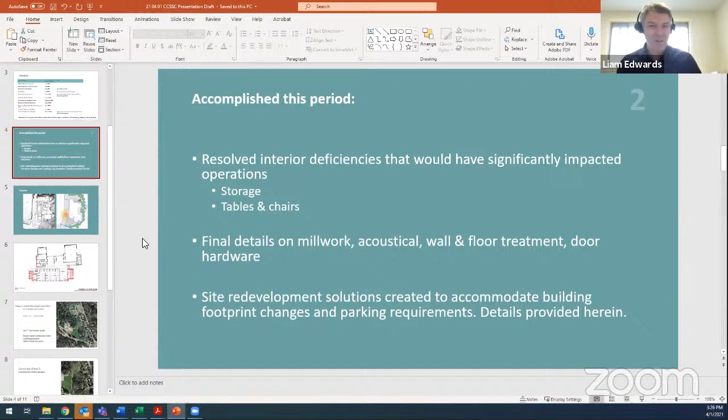Yeah, and it's even down to the millwork. If we're building all these lockable cabinets, how do we schedule those keys for all the cabinets? Who has access to what? Countless decisions in these areas of fine details we're working through.

I'll just pause, see if Liam or Sam or Jackie, Jamie want to add anything into all of that. No? Okay, I don't see anything.

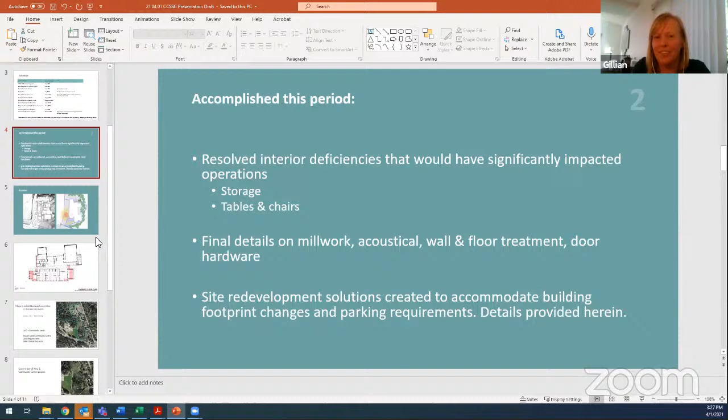Great, so now we'll think about the exterior. So that's just some of the work we've been doing on the interior. But there were pressures on the exterior design we noted, and we'll talk more about that as we go through. With the next slide, we can look at one of the main issues we were addressing.

Hate to interrupt the flow, but the other thing we should have added is the redevelopment of a building permit application. I know we talked about it last time, but that's been another stream of work. So speaking for the design team and others, lots of concurrent work happening simultaneously.

Those elements we just touched on, and now we're going to get into the site, but from a professional perspective as well, we're also resubmitting and getting an updated building permit because our old one's from 2018 and the codes keep changing. So that's another stream of work accomplished in the last little while.

We don't have the new building permit yet, though, do we? Well, we're just doing an amendment to our existing one by updating - we had to get some new geotechnical studies because of little bits of extra support needed for a revision to our updated BP.

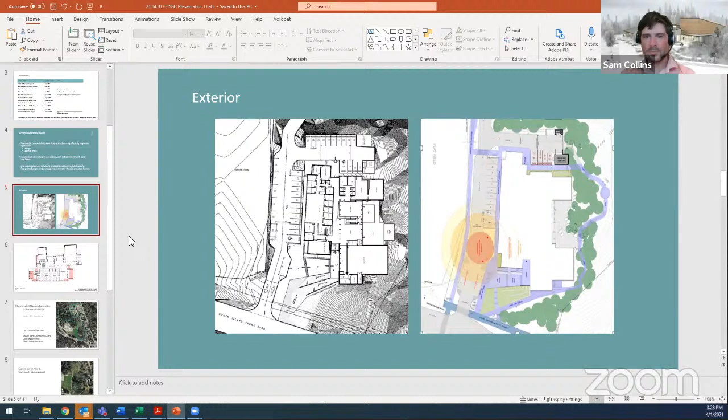Sorry, Gillian and Liam. No, absolutely, it's fine. So looking at this image here on the screen, on the left was the proposed. Can you make the image bigger, like maybe get rid of the thumbnails on the left side?

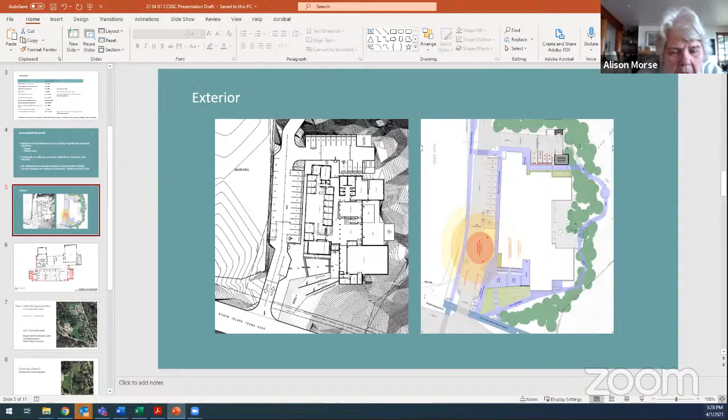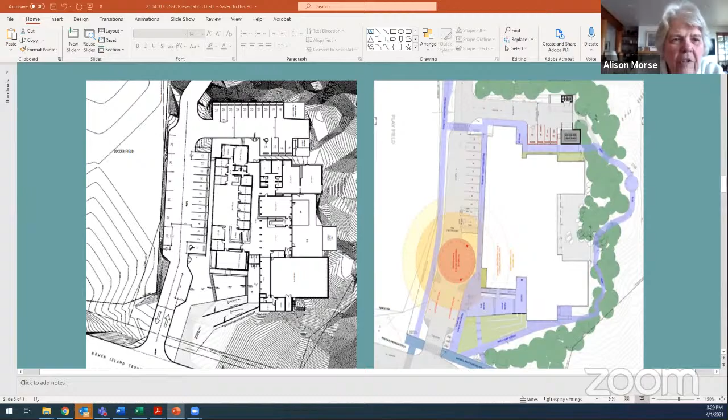How's that? That's better. But blow it up a bit. If you go into presentation mode, set it to play PowerPoint, you get rid of that stuff, don't you? I think you'll lose the way PowerPoint works. You probably don't see it as the full PowerPoint right now, do you? No, I'm seeing your toolbar across the top and everything. So yeah, let me do this, because the way PowerPoint works, it changes the screen it moves to when you load it. Okay, so now is that better?

That's better, but could you make it a little bigger? And I'm on my big laptop. Now I have to stop. Oh, to make it bigger, never mind. Okay, go back, definitely forget it. Alison, you may be able to just minimize seeing us and maximize. Yeah, no, I'm going to do that anyhow.

Okay, I'm going back to the old screen because I can make it a bit bigger. This isn't so much about seeing the detail in this screen. Rather, it's about hopefully you can see the footprint of the building.

And so that was the original design footprint with the original entrance and parking. And this is the new footprint, which is very, very similar, just slightly larger.

So one of the challenges we noticed with the plan on the left was a lack of function for access of vehicles and pedestrians, particularly if you think of people just dropping off and picking up people from the community center. In this previous plan, there was no way to turn around easily and get out, so it's easy to imagine the congestion that would occur. Imagine 180 people coming out of a performance and how this would function.

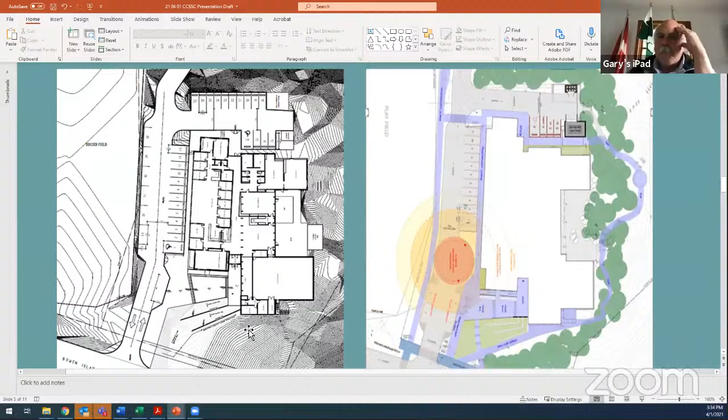Where does the gravel parking area that's beside the field and between the field and Trunk Road right now fit in, is that incorporated? That's basically the entrance, that disappears with the entrance. If you can see where my cursor is right now, that's basically where the gravel is right now.

There's two things maybe to add. We maintained the fire truck access to the field of play in this design, which is an important aspect. There's an emergency access right there, with some gates. So that's maintained. The larger service vehicles will still have to do their hammerhead turn at the back of the lot. That was all part of the discussions and conversations.

Well, the reason I asked about the gravel parking area is whether that could be utilized as a drop off for a bus. As you can see, the gravel parking area that exists right now is right here, and the diagonal red line I just put on the map is the fire emergency vehicle access to the back of the school, which would go across the field. What we're proposing as a design here, and the next slides will take us to the expanded area request, would provide even better, potentially better access to the back of the school.

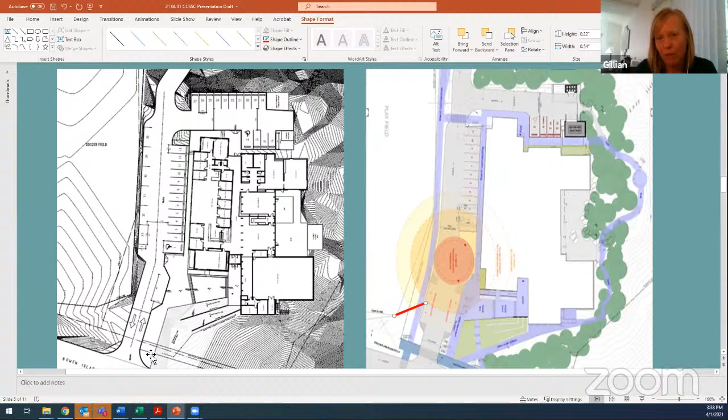Another point about the community bus is that the greatest likelihood of people getting off the bus to come to the community center is when it's on its return route to the cove, so stopping on the other side of the road. People would be picking up the bus to leave the community center, heading back out towards Blue Water. Yeah, so that helps a little bit.

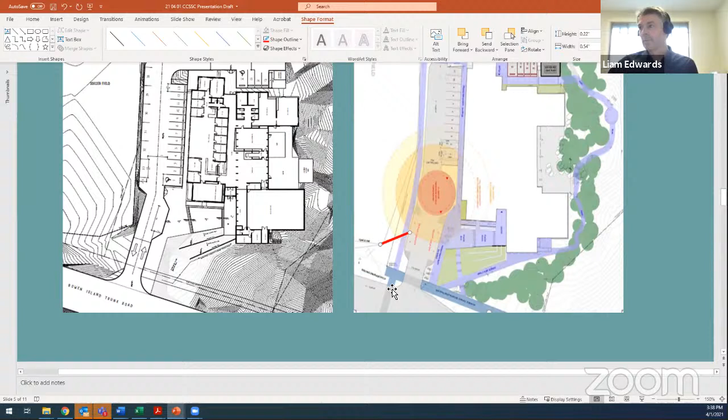And the Eagle Cliff bus. Right, yeah, well, they'd have to walk down the hill to get to that one. But there is a bus stop just down the hill as well, so they could easily just walk down to get on the bus to leave.

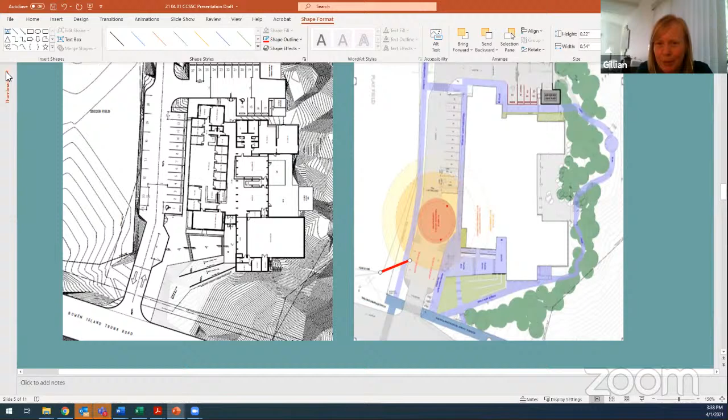So I think that segues nicely, Liam, into the next section. Okay.

So I can't recall, Gillian, this was just a reminder from the last meeting about the pressures on the footprint and what was adjusted. I don't think there was anything really to discuss on this one, but a reminder as we get into the next phase, thinking back on the previous slide as to what those pressures on the site were that changed the surrounding area and the civil infrastructure of the site.

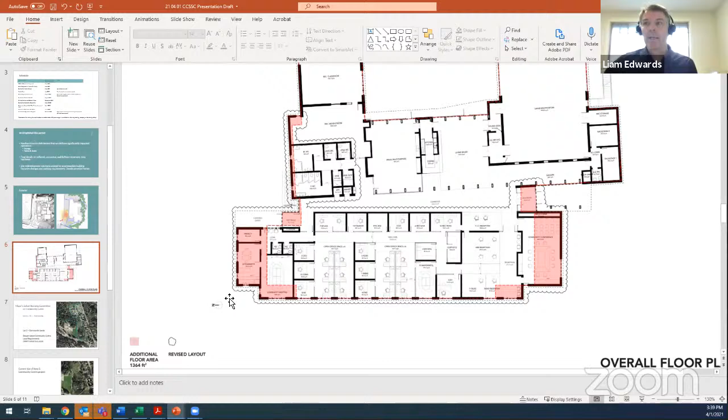So with the pressures on the site, when we look back to this slide, we see that much of the parking along the building edge remains, but the parking along the fence edge has disappeared because we also felt that this was too tight and that we needed easier and better access to the parking. And then in the back of the building, we lost this parking because we started getting too close to the steep edge. There's an embankment, quite a steep cliff off the edge.

And we also needed to improve some of the access to garbage collection, recycling collection, and things like that in the back here. It was very tight before.

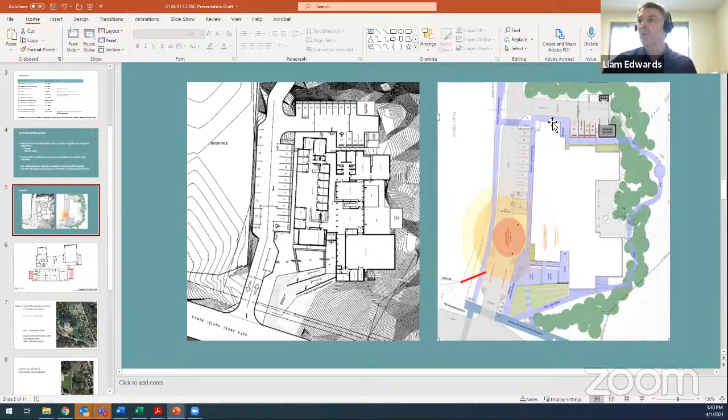So what we're looking at now is, to meet our own zoning requirements, we need to find this additional parking that we've stripped out. Plus, any additional parking that we could get would be highly beneficial for the facility, because we've known all along that parking was going to be an issue.

And then even perhaps more importantly than parking in and of itself, during construction we want to be very clear with the vendor that their trades, their construction vehicles, are going to have to stay in a designated parking area. We don't want them scattered throughout the cove or up and down the Trunk Road Hill. And there was never any consideration for where the laydown area would be for construction, or where there would be a staging area for the construction.

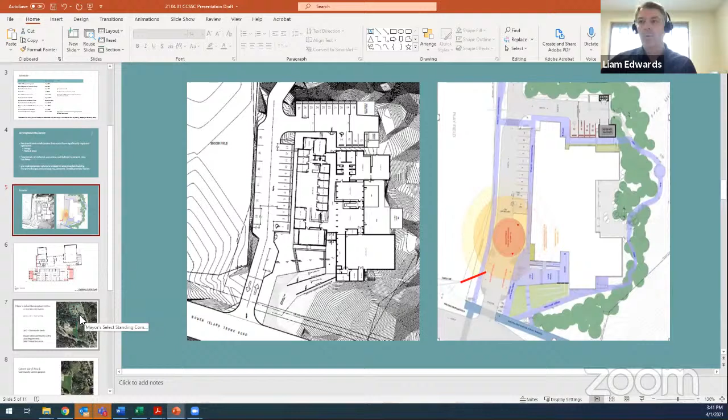So we felt like, okay, we really need to think about the construction needs and additional parking needs. So we started exploring that.

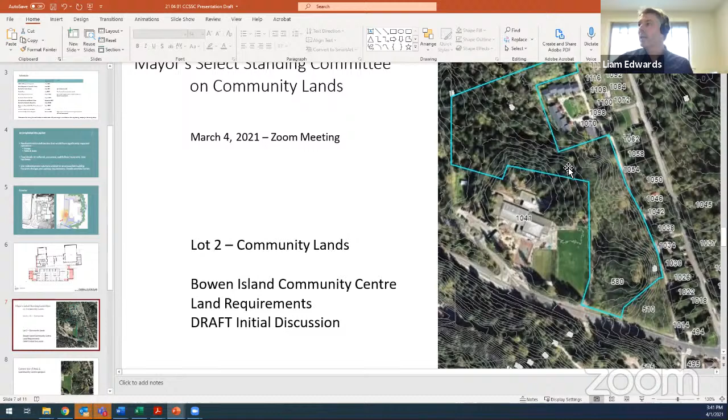In exploring that, we looked at the entire lot 2 of the community lands, which is this blue line here. We identified the land allocation to the community center as it currently stands. We're pushing right up against this boundary, which is that steep drop off I mentioned, and another steep drop off on this edge. So this land here is not really usable at this point in time.

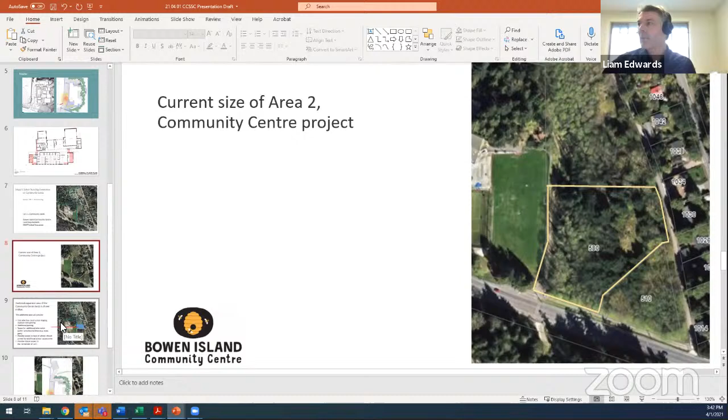So what we came up with was this idea that we could potentially secure additional land north of the existing community center lands to help satisfy those needs. It's a really cost-effective way to deal with the construction. They've got staging, laydown, and parking. We've got additional parking for the center itself. It could also be an area where staff park, so staff aren't taking up any parking right adjacent to the facility itself.

There'd also be additional area for additional community activities or facilities. There's a lot of discussion right now in the community around a skate park, and there's the possibility we could put a skate park in this zone. That would go quite nicely with the entire community campus feel, because in this area we have the bike park that was recently built as a collaborative project, and we have the school itself, the tennis courts, the turf field, the soccer field. We know the children's center is looking to put an after-school care facility on site at the community center. If we had a skate park here as well, that would be a pretty nice amenity. Or it could be something completely different.

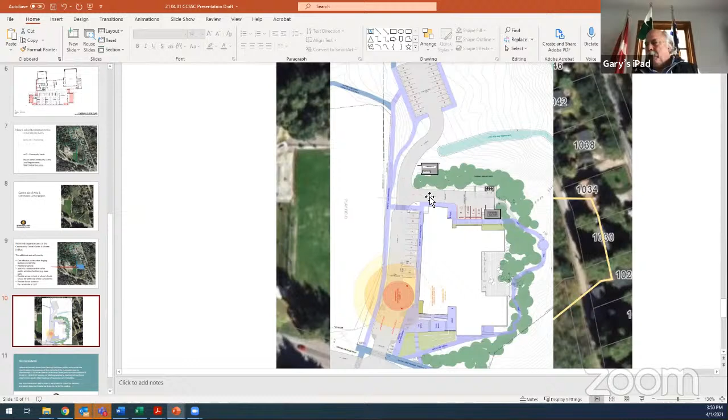If we look at this slide - we did go to the mayor's standing committee with this as well to get their input on it, and they had the same question, so it's a very good question. Originally I was proposing that we take this dark blue line in this way. They suggested no, go in this direction right to the edge of Seniors Lane, and leave that space up there for potential housing projects, so there's still adequate space in this area for housing, which is what it's currently zoned to allow for.

And in talking with Daniel, he said that if we were to bring this to council, and council were to approve it, it'd be a very simple amendment to the bylaw with the zoning map, and that you could also still allow for multiple future uses in here.

One of the things the select standing committee talked about was on this edge along Seniors Lane - it's incredibly steep and it's not favorable or affordable for housing or any development at this time. But in 30 years maybe it will be, or maybe it's 40 years or something. So there's still an opportunity to utilize that - row housing along there or something.

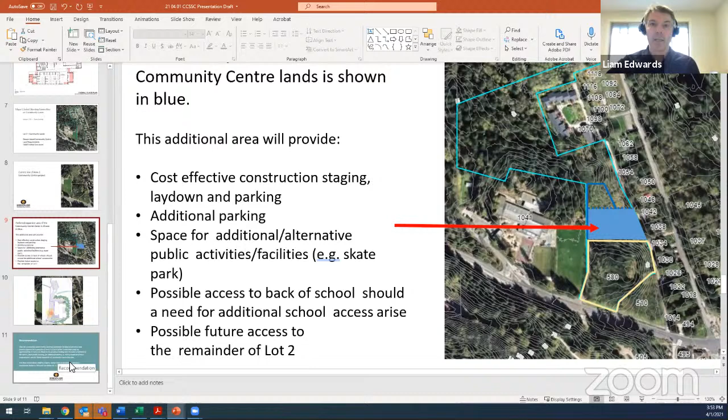So our primary question for this portion of the presentation is to seek this committee's approval to make a recommendation to council: that the Community Center Select Steering Committee recommend council approve the expansion of Area 3 of Lot 2 of the community land by approximately 1.2 acres, as shown in the proposed zoning area boundary presented at the April 1st, 2021 meeting, for additional parking to meet present and future requirements and for future expansion of community center facilities.

Do you want to say community center facilities, or community use facilities? You could just say community facilities. Or for future community facilities, not even expansion.

There we go. And that council directs staff to prepare and present to council the necessary amendment bylaw to the land use bylaw number 57 for first reading.

I'll move that. Do we have a second out there? And then we can have a discussion about it. I'll second that, Gary. Thank you, David.

So does anybody have some input on this particular recommendation? Or do you think it's a go? We can just vote on it. Speak now or forever hold your peace.

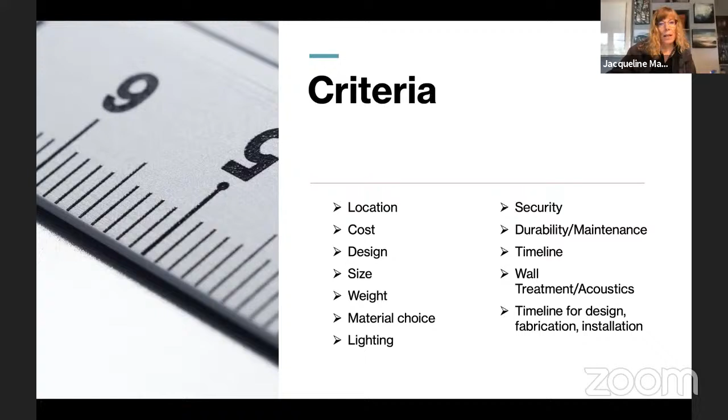Looking at indoor and outdoor installation, some considerations. Indoor, there are vast possibilities within the building, which we looked at. It would be highly accessible to the public, with lots of opportunities for the public to see it. We need to ensure it is complementary, reflecting back on that criteria. We have wall space available, and it must potentially fit within our budget. So we could consider a number of those criteria within the indoor option and cover them all off.

The outdoor art installation, similarly looking at the positive side, serving as a landmark or interactive installation reflecting the whole mandate of the community center about bringing people together. Public art has that ability to build community and that strong sense of reflecting our culture and local community. It could certainly be designed to augment landscaping and be a really impressive feature of the building. However, the cost of the display is not included in the current budget, and additional funding would need to be secured. So that's a factor.

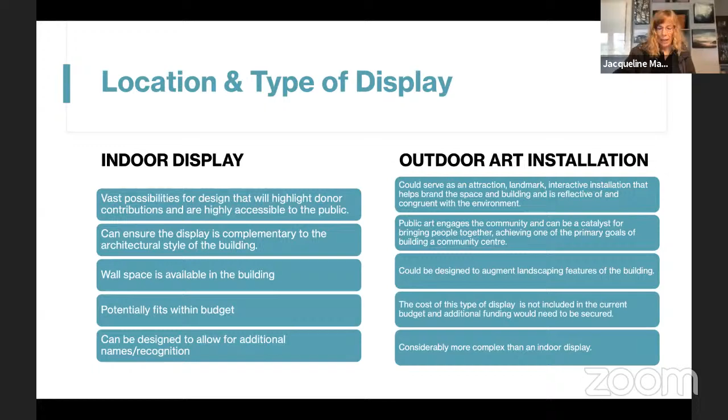The outdoor art installations, we looked at possibilities and grew to understand that it's considerably more complex than an indoor display would be, learning more about what that might look like or what that might incorporate. Having taken a look at that and done the work around it, we came to this consensus: based on the research and discussion, we really feel strongly that an outdoor installation not be considered at this time. I'll move that.

Yeah, I agree, Councillor Morris, that was definitely your comments, and it reinforces some of the work that we did, reinforcing some of your comments. Also the factor that landscaping design has not been finalized, so it's really difficult to identify an appropriate location, and also to go through that list of criteria to judge it against.

And the cost, that's a big factor beyond the current budget. We absolutely agree that the capital costs of constructing the building should remain the priority for fundraising endeavors and activities. We don't know if there'll be additional fundraising needed at this point, but we anticipate there probably will be, so that's where we need to place our efforts.

Of course, this decision doesn't mean that in the future there can't be a separate project for public art installation. We'd actually really encourage that happening maybe down the road, as a separate project with its own budget. I don't know if you want to talk about that now, or maybe I can go through some of the other slides and we can have a general discussion.

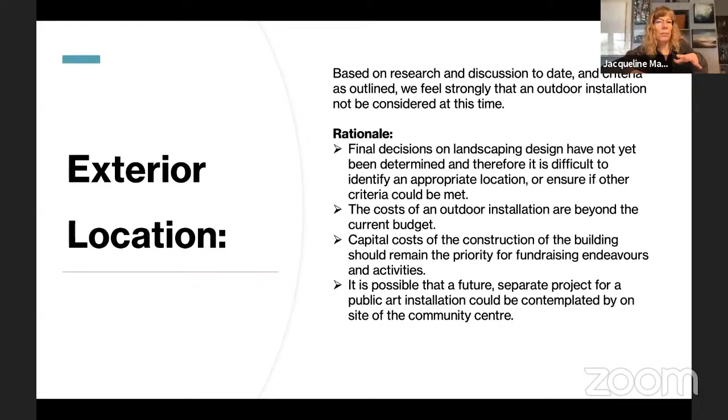Okay, maybe I'll keep going. So we want to talk about the indoor display. What I've got today are 3 location options that we've come to. There were a number of other ones we considered, and again, going through our criteria, looking at location, cost, maintenance, lighting and weight, we had to eliminate a number of them based on that criteria. So this is what we've come up with, our 3 to consider today.

So our first one I'd like to show you, the bottom right will show you the location. The doors out there are the front doors leading into the community center. So you would come in, and that grayish wall is the gallery wall, which is part of the large multi-purpose space. The picture on top shows the actual space available, those 2 panels. We really like the size of this.

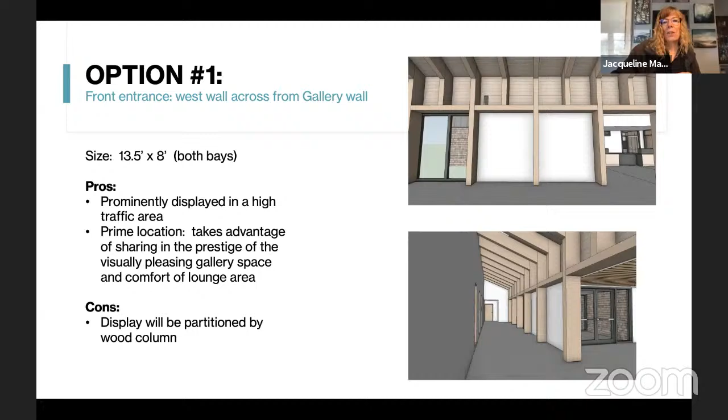Option 2 is located near the back door entrance, and you can see in the left image where that wall is. The room on the other side is the washrooms, so you would come in the back, and it would be to your left.

We like this because of the size. Sorry, I didn't mention the other one, which was an adequate size - we felt the 13 feet by 8, 13 and a half feet by 8. This one is a bit larger, 16 feet, almost 17 feet by 8, so it would allow for expansion. We definitely have covered off that criteria.

But in terms of concerns we had about it, it is kind of tucked away in terms of the main activities of the building, and it wouldn't be that great trying to view it because, of course, that's a busy corridor and probably high pedestrian traffic back and forth, which also could bring up some issues around maintenance because it could require a little higher maintenance and cleaning with so much movement back and forth around there.

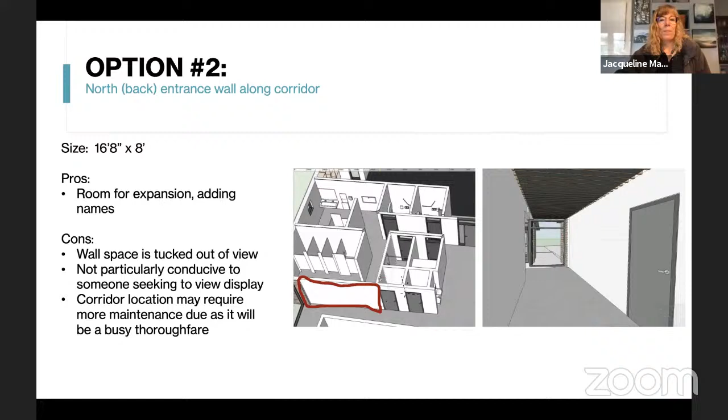Our number 3 option here is the wall. It would be facing you as you come in the back entrance again, and it's indicated on this drawing that it's 9 feet, but there is a door right here, so you would be losing that space, and it ends up being more like 6 feet. It's not ideal in terms of space, actually, but it's available to us, and it would be highly visible as people came in that door.

But again, like the second option, it is tucked away out of view and kind of in the back, so not ideal, and again the same issue about the maintenance. We also thought that would be a really good spot for a community notice board, so it's a little bit less attractive than the other 2 options. So those are the 3 options of location.

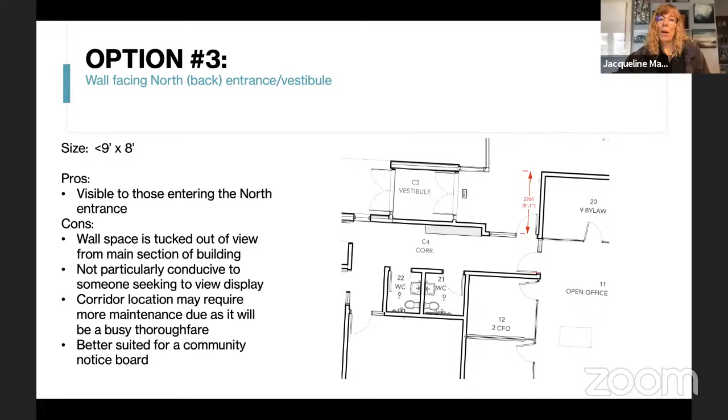Just now going to take you through some design concepts and their cost estimates.

Starting at the lower end, we had some considerations such as including some colored glass with etched graphic elements. We would like it to be reflective of the natural environment of our island, and possibly include some graphic treatment, maybe a kelp forest or other marine reference. And of course, we would maintain earth tones, wood grains to complement the community center architecture, and we would try to incorporate any of the branding around the community center.